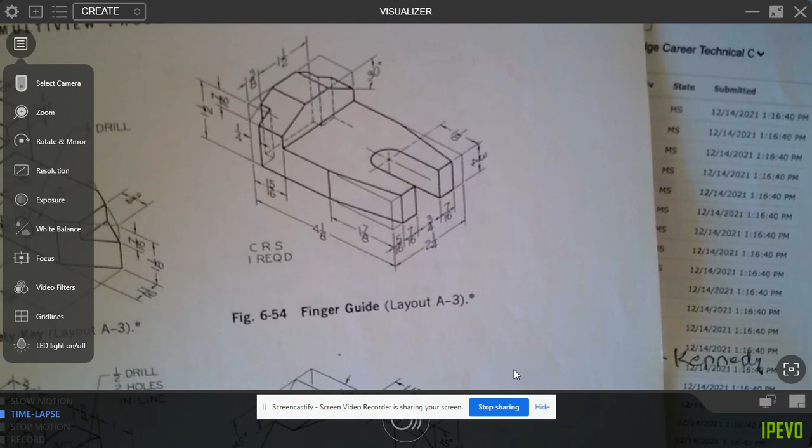Okay, we are going to try to draw the finger guide, and I'm going to try to do this quickly. We're going to start by blocking it out so it's 1.5 inches tall and 4 1/8 long.

I'm going to get in the correct layer before I start. I'm going to draw a line 1.5, 4 1/8, 1.5, and C for close.

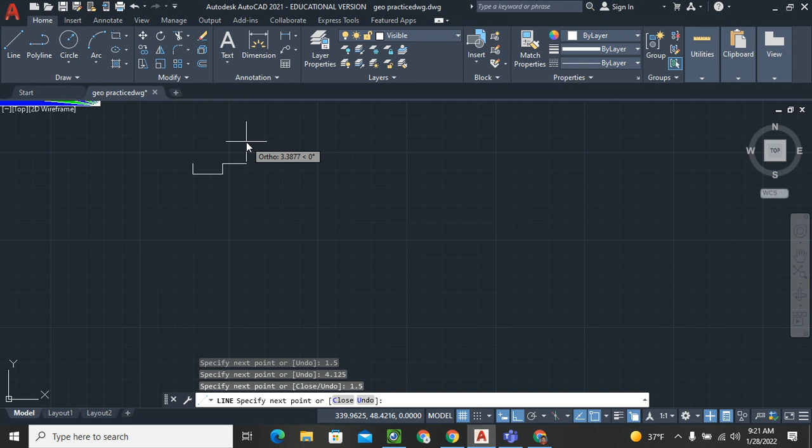Okay, I have an area on the front that is 3/4 inch tall, and from the back to the front edge is 15/16. So 3/4 and 15/16. I'm going to use offset, 0.75, and offset by 15/16.

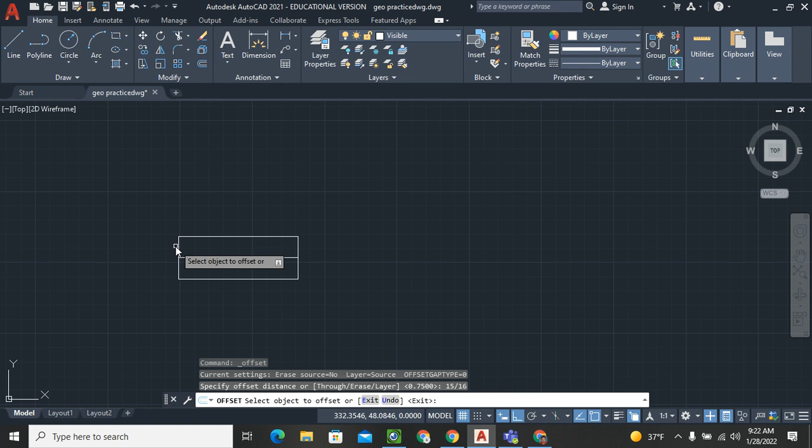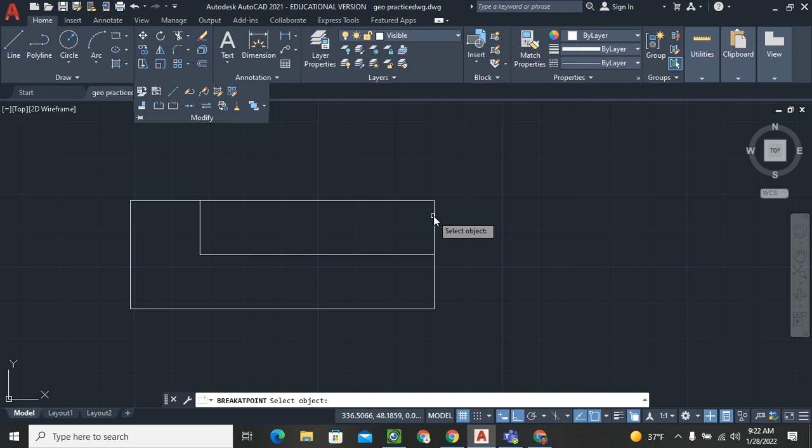I'm going to trim. I'm going to leave this for now. Let's do a break at point. We're going to break this line at that point, and break at point again at this line at that point. I'm going to change these to a different layer. Instead of the visible layer, let's make it our construction layer.

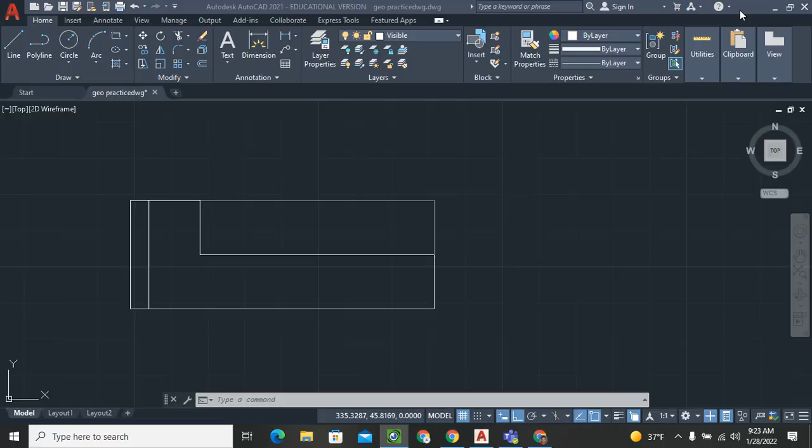At the back of this object, it has a cutout that is 1/4 inch deep. So I'm going to do that by 0.25, and draw it all the way up for now. It also has a line here that is 7/16 from the top. So we're going to come down 7/16, and draw a line to there.

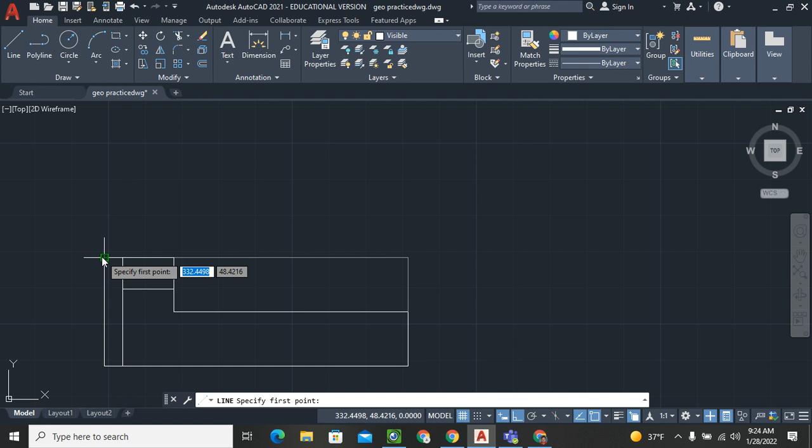Let's go ahead and start our top view. I'm going to come up 1 and go 4 1/8, and our depth is 2 1/4, 4 1/8, and C for close.

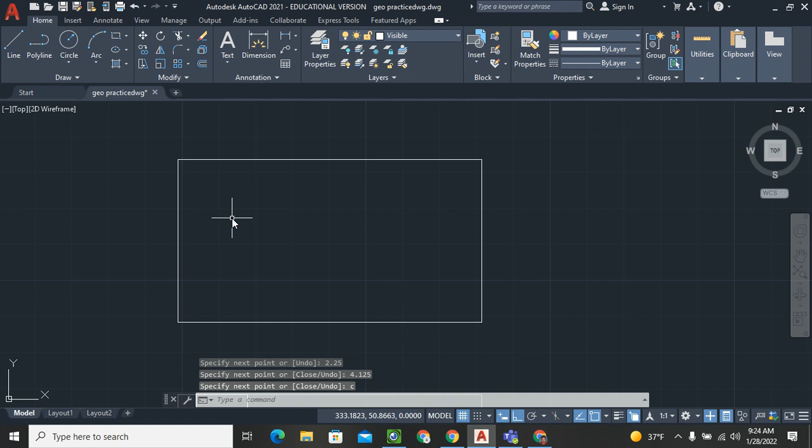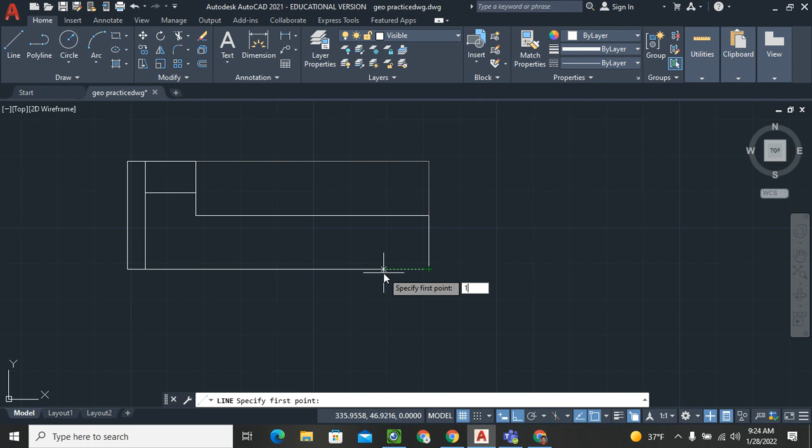This one has an angle created at 1 7/8 from the front edge. So let's go ahead and do that down here. 1.875, enter, and put that line in, and I'm going to carry it up.

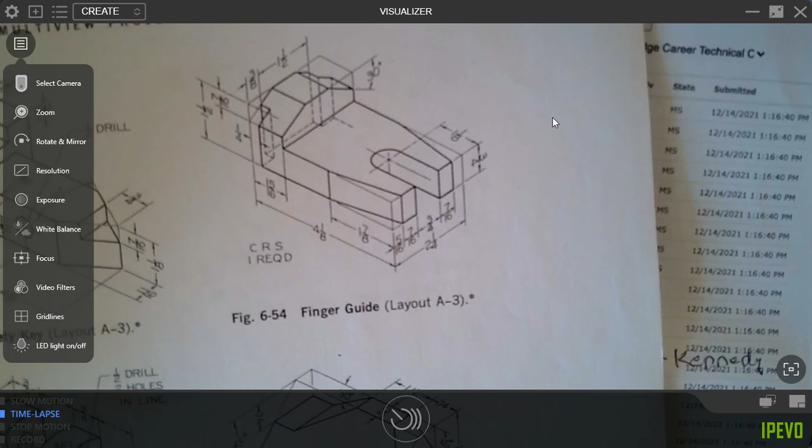Okay, let's go to our front edge again. 5/16, 7/16. So I'm going to come up 5/16 and go back to here. That creates our angle. I'm going to come up from that point 7/16. All right, let me escape out of that.

Let me do that again. Line here, going up 7/16, and I'm going to come all the way back to here for now. And I'm going to draw a line in our center here that just gives me a reference point.

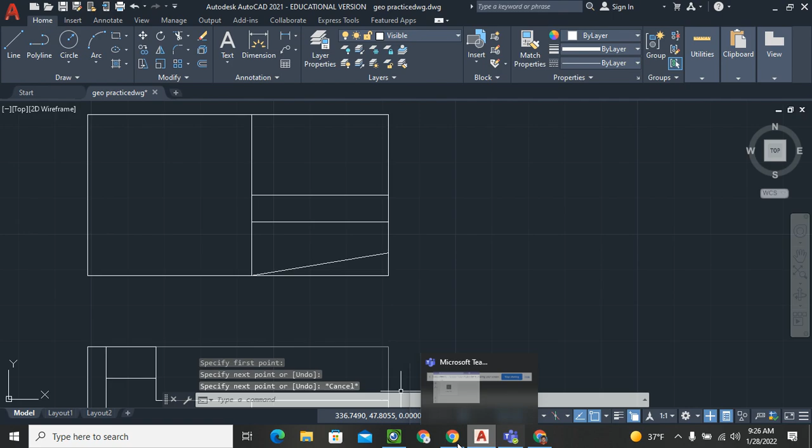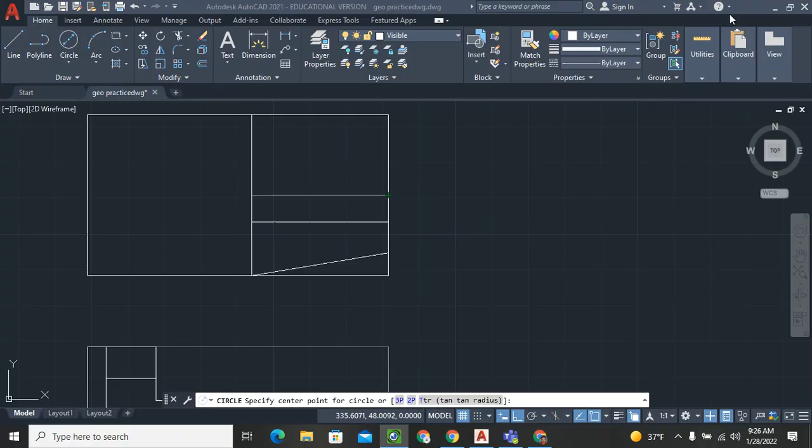1 1/8 from the front edge, I have a 3/4 inch diameter circle. So let's create it. Let's do a center diameter circle. Starting here, we're going to go, and I done forgot my number. 1 1/8. 1 1/8.

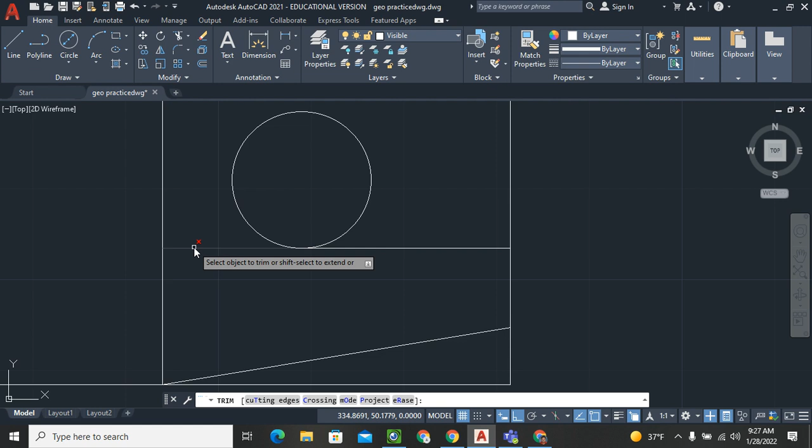And we're going to create a 0.75 diameter. All right, now I don't need this anymore because I just used it for a reference. I'm going to trim this, and this.

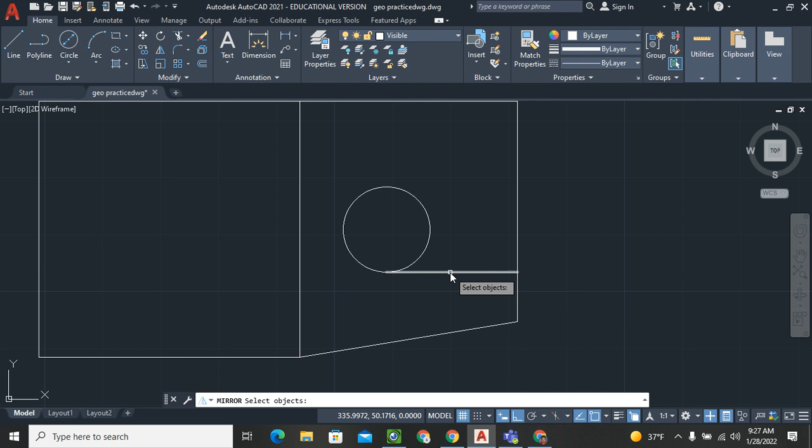Now I'm going to - probably should have went ahead and mirrored before I did that. So let me show you what I knew. Because this line is shorter now, so our center has moved up. So let's mirror this and this on that center point and that center point.

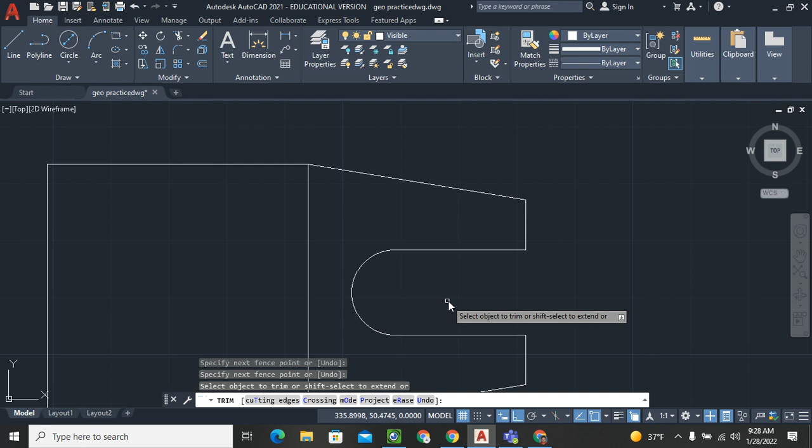Now I can trim here, here, and here, and here. I don't need that anymore, so let's delete it. Let's bring this point up.

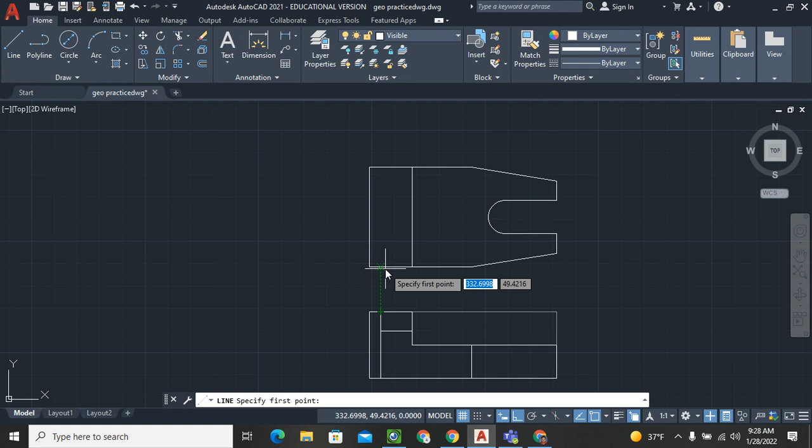On our back corner, let's see how deep we need to go. It is 3/8 of an inch this way, so I can bring this point up, go up 3/8, and back to our edge here.

And let's go ahead and just mirror that. And let's trim.

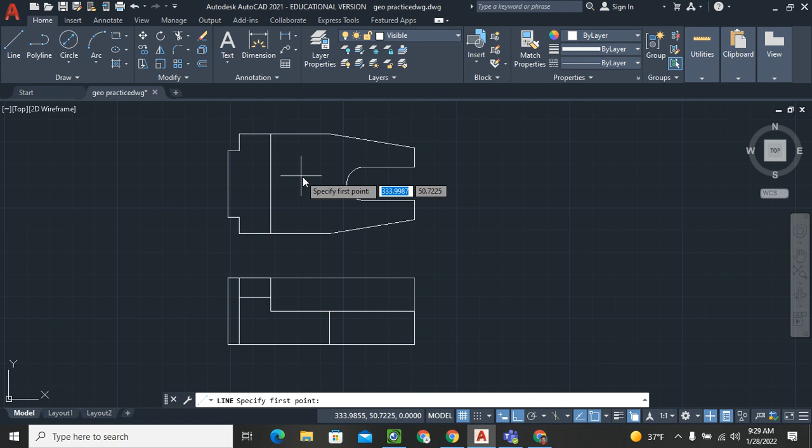Okay. Now that we have this also, I can create a line here, which will be a hidden line. And let's create one from there that would actually be our center line.

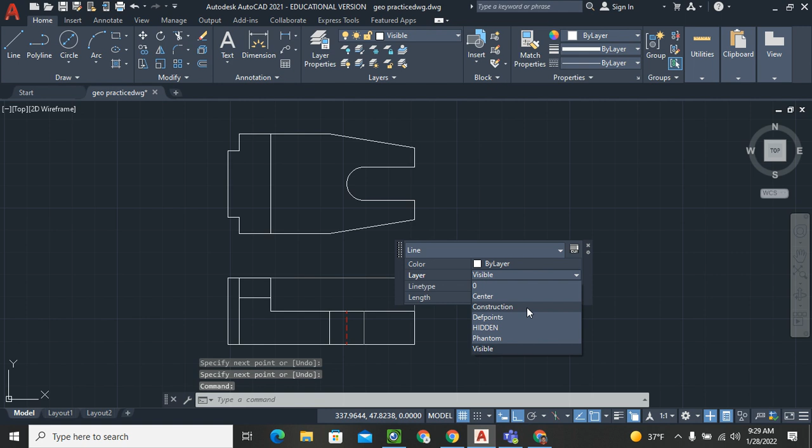We're going to change it into a center layer, but it's not long enough. So the easiest way to do this will be with grips. If I click on this point now and bring my cursor up, type in 0.125 and do the same thing with my bottom one here. All I did was extend that line.

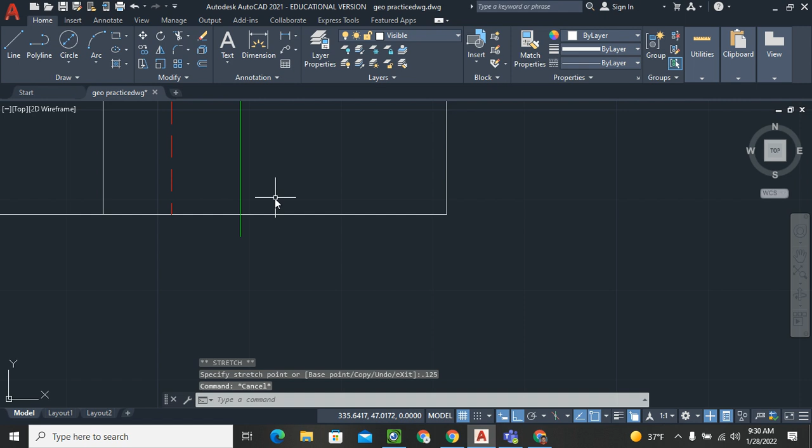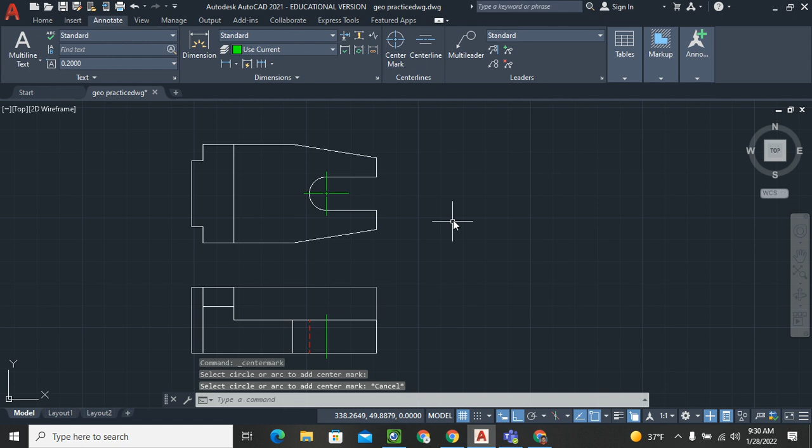I could do it a different way by offsetting and extending to it, but that's the easiest way you can do it on CAD. All right, now that I have those two views, let's go to our right side view. Before we get out of that, let's go ahead and put our center mark on. Annotate, center mark, and now let's create a line.

From here at a 45-degree angle, so I'm going to make it 10 inches too long. 10, less than sign, 45.

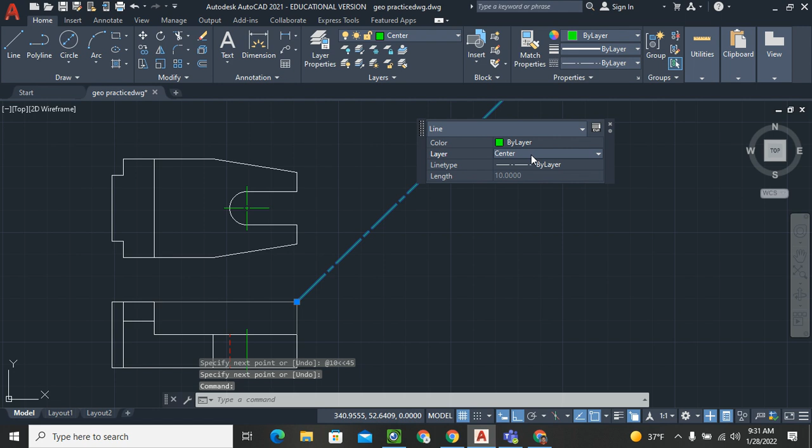Make it into a construction layer also. Layer back to visible here. Now let's go back to construction. All right, I'm using this to block it out for my overall size.

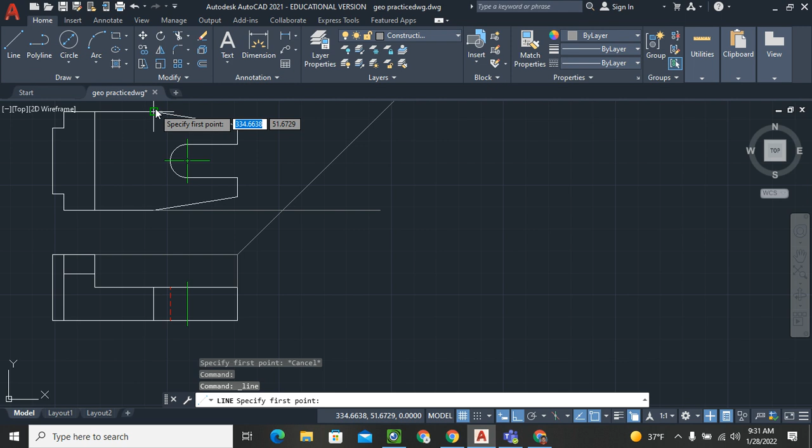I'll bring that down and bring that down, and my width and height are created. So I'm just going to trim around those for now. That is my actual height and width. I don't need these anymore, so I'm just going to delete those off.

Okay. Let's draw us a line here. Let's go all the way across, I guess, and trim. And let's bring our points down here.

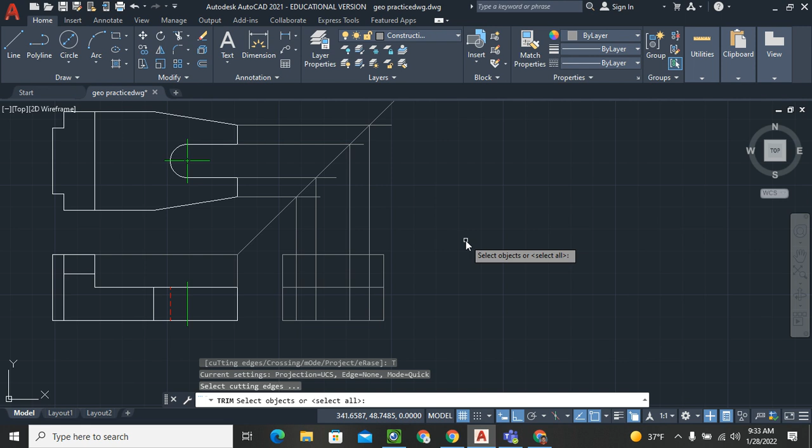I'm going to use, when I do the trim this time, the cutting edge, which on your computer you probably can just right click and select everything, or select the line. This is my cutting edge, so now I'm entering. I'll right click and I can trim all of that off at one time. And we're going to delete those because I don't need them anymore.

Everything that I have here will be a visible line. So let's go ahead and do that also. I'm going to have some hidden line. Let's go ahead and do our angle thing on this view. We have a 30-degree angle.

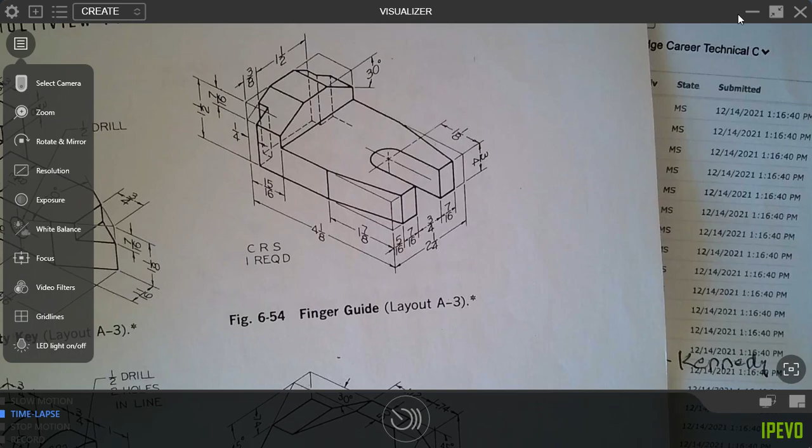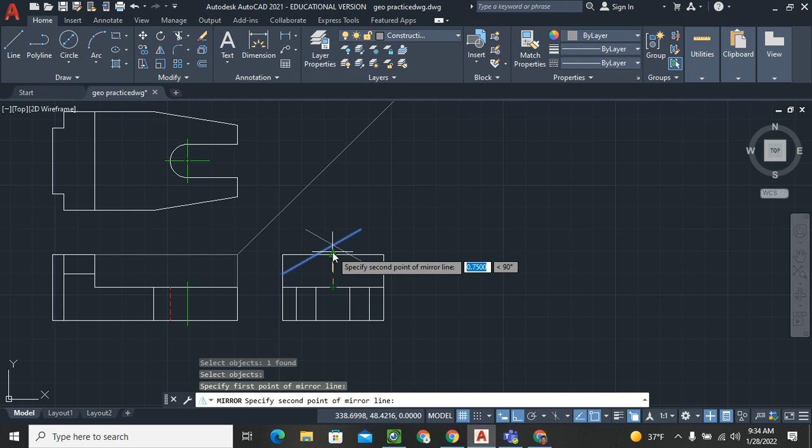And I didn't look where it starts. 30-degree angle, and it's 7/16 down. So I actually did already know that, so I could have done this. Let's make it 2 at an angle of 30. And I'm going to just mirror that.

And trim. Those will be visible lines. We'll go ahead and change that. I will have some hidden lines here.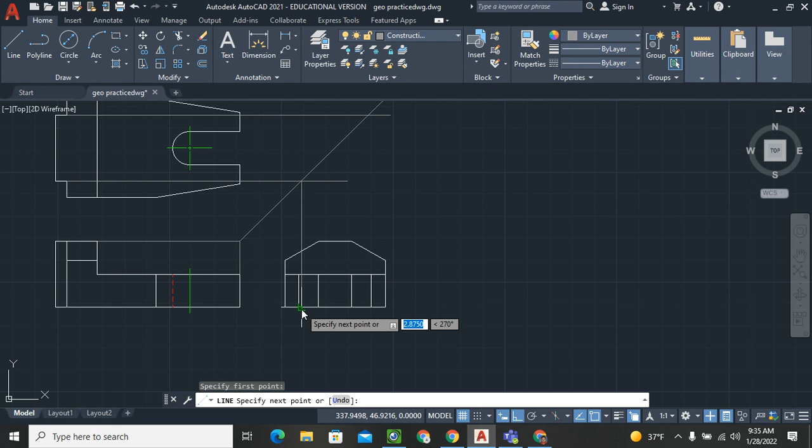So I can draw those down, and this down. And trim, trim. And change those two into hidden.

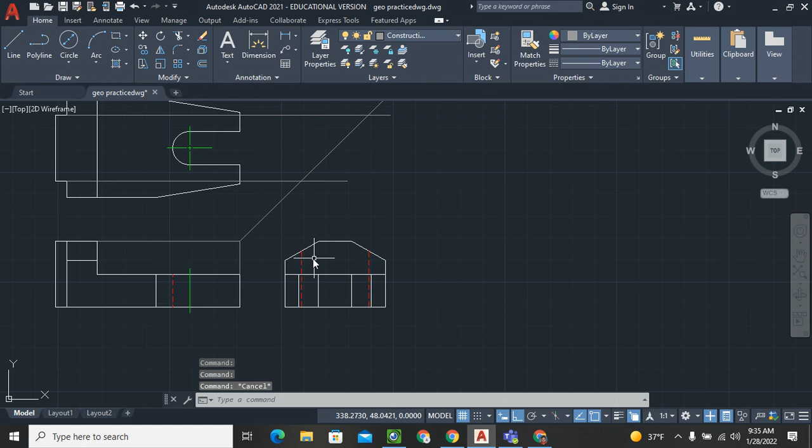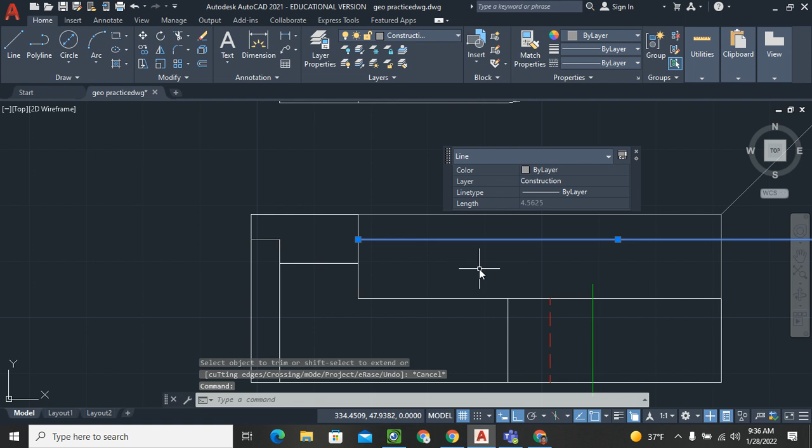When I have those 2 points here, I know where this stops now. So I can trim here and here, delete that, and change that into a visible line.

And I pretty much have this complete, except I do not have my lines on the top here, and I do not have my center line here. So let's change our layer to center. Come to annotate, center line, click on this line and this line, and it makes my center line the correct length.

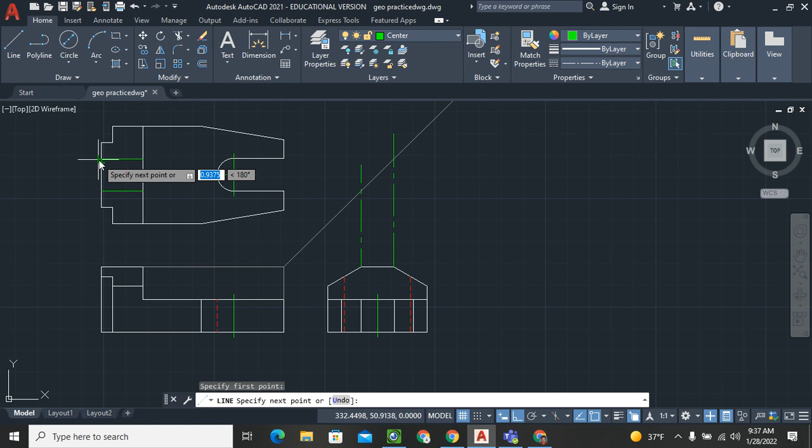And then I can go back home, project up, and draw this line here and there. Change those two into visible, and delete those two.

And I think I have actually completed the finger guide figure 654.